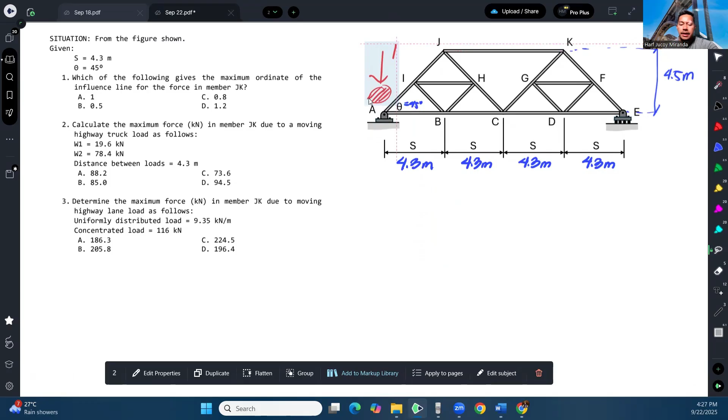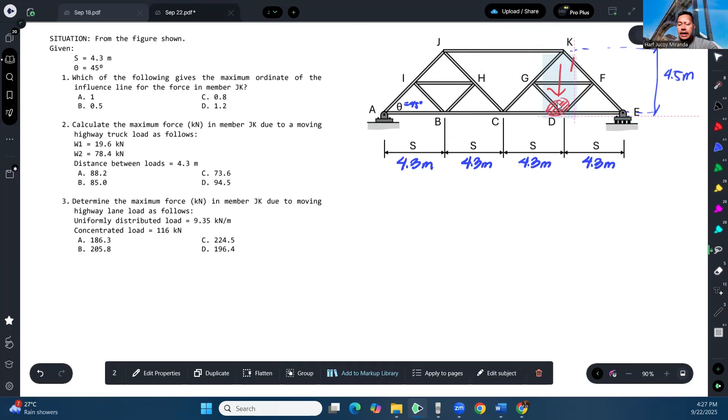So first, we place the load here, then find what the reaction of JK will be when the load is here. Then we move it to B, and find the reaction of JK again, and so on, repeating until we finish going across the truss. This will be the influence line for JK.

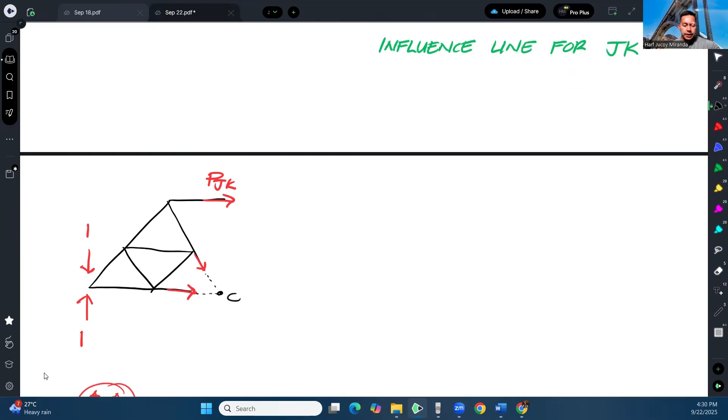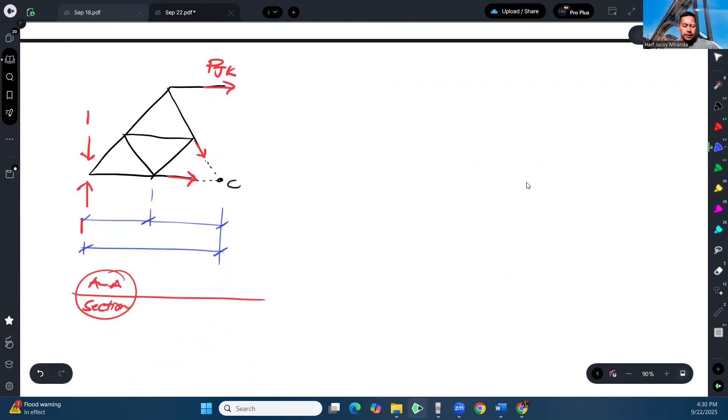So this distance is 4.3, then this is 8.6, and this is also 4.3.

Let's do summation of moment about point C equal to 0, assuming counterclockwise is positive. By the way, I assumed JK and the other members are in tension, which is just an assumption, but that's our standard assumption for trusses.

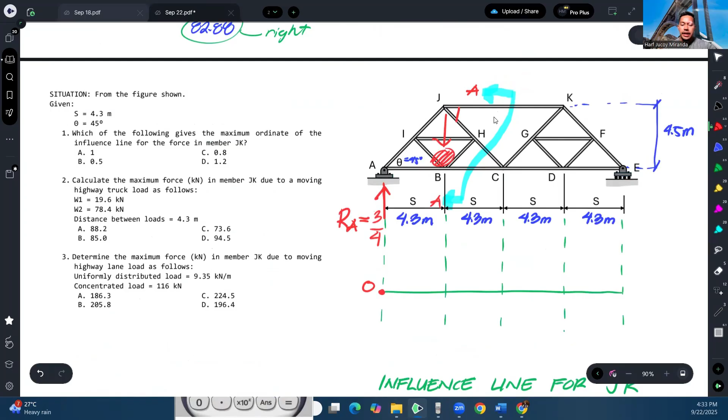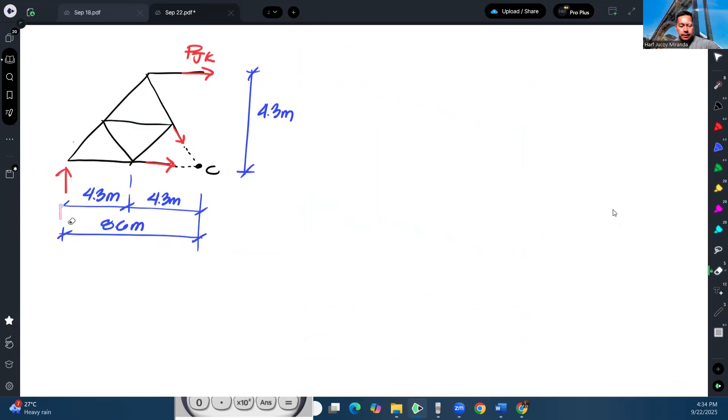So para makuha na naman natin yung reaction sa JK, magme-method of section ka lang ulit. So balik, ito pa rin yun, no? Yan pa rin. Pero ito malilipat, kasi ito hindi na 1, 3/4 na. Nandito na yung 1. Yan. Okay? Ito yung section AA pa rin.

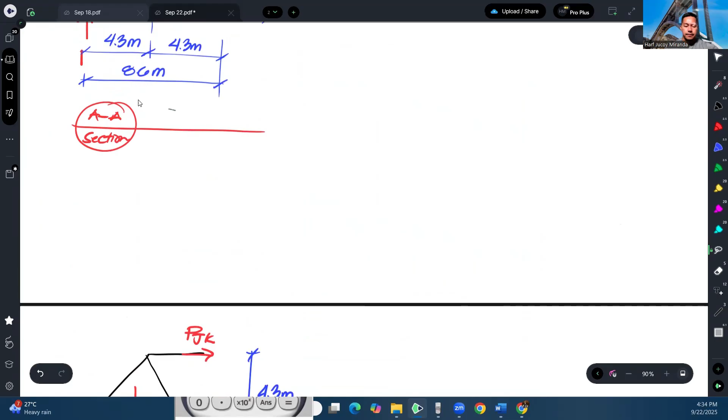Okay, so once again, para makuha natin yung reaction kay JK, mag-moment lang ulit tayo sa C.

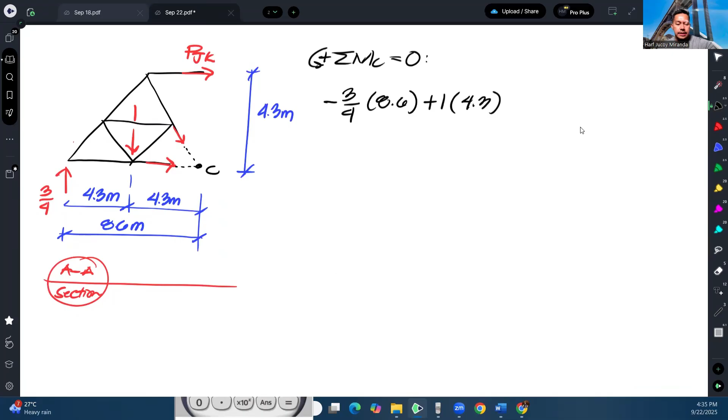So we have, unahin ko na itong 3/4. So 3/4 times 8.6, that is gonna give you clockwise. And then yung 1 kilonewton times 4.3, and that is counterclockwise. And then yung force sa JK, ang moment arm is 4.3 and then clockwise. Ayan, so we can solve for the reaction at JK. So that gives us negative 3/4 times 8.6 plus 4.3 minus x times 4.3. Okay, and that gives us negative 0.5.

So ibig sabihin negative, ibig sabihin pag nandito yung load, si JK, compression, kasi yan yung ordinate niya, negative 0.5. So balik tayo dito, kung nandyan yung load, nandito ngayon yung value nito, 0.5, nasa baba kasi negative. Okay, and then we will just continue this.

This time, ilipat naman natin siya dito sa gitna. Okay? Kapag nilipat mo yan sa gitna, hindi na ako mag-solve ng reaction, symmetrical na, so 1/2 na to. Okay, 1/2 na siya, tapos balik, method of section na naman.

So ito ulit, bali, kopyahin ko lang to, actually kopyahin ko na lahat. Mag-edit-edit na lang tayo. Yan, so bali ito, 1/2. Tapos ito, wala na dito, wala na dyan. Actually nandito na siya, nandyan na yung 1. At dahil nandyan na siya, actually di na siya kasama dun sa free body diagram nito, kasi ito lang yung section natin eh. So wala na, hindi din natin isasama.

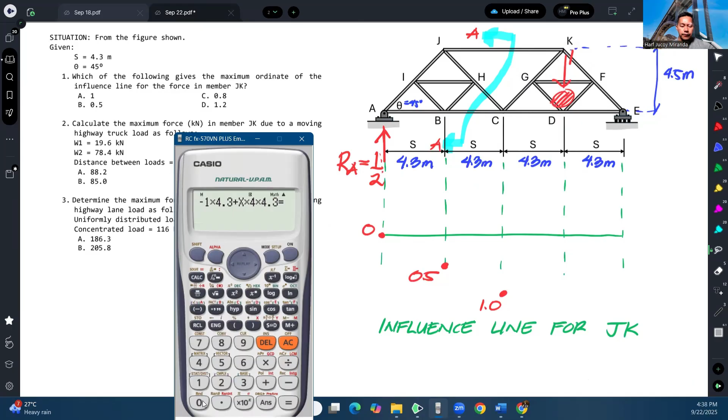Okay, and then next, lipat natin to dito, dito naman siya. Kapag nandyan naman siya, again mag-moment tayo dito sa E, no, para makuha yung reaction sa A. Moment sa E, so 1 times 4.3, okay, clockwise yun, and then plus reaction sa A times 4 na 4.3. So lalabas dyan 1/4. Ayan, so 0.25, so 1/4 yung reaction dito.

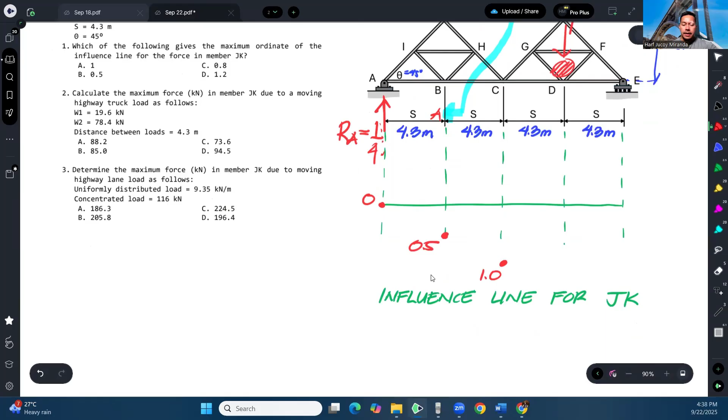Okay, so kapag ganyan, ito ulit, method of section ulit. So I'll just copy this once again. Okay, but this time, 1/4 na lang to. Tapos wala na dito yung 1 kilonewton. Okay, so the equation will look like this, ito 1/4.

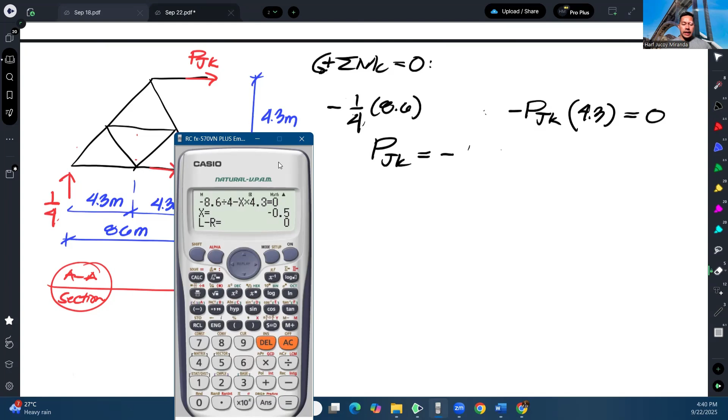Ayan, okay, so kapag ganyan, we will solve for P at JK. So that's negative 8.6 over 4 minus PJK times 4.3, and that gives us negative 0.5. Okay, so our influence line ordinate when the load is at point D is negative 0.5.

So ito, ayan, and lastly, kapag nilipat natin to dito, ito hindi ko nasasolve ah. Pag nilipat mo yan siya dyan, ang magiging reaction mo dito, zero.

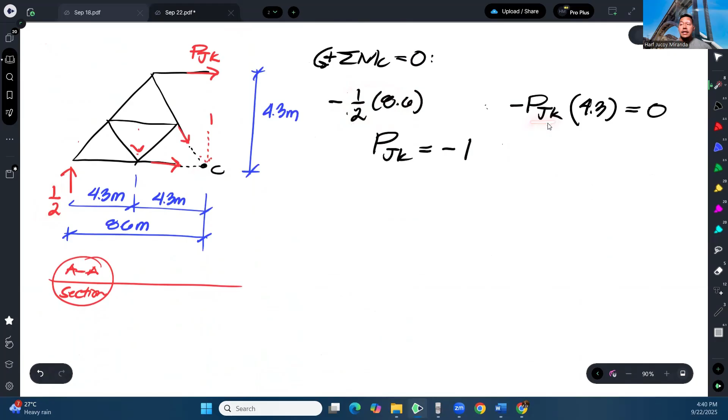Zero na to, kasi nandyan na siya. So ang sasalo dyan, yung reaction na sa E. Kapag nag-zero to, nag-method of section ka, isipin nyo zero to. So pag nag-moment ka dito, zero to. Anong mag-value ng JK? Zero din, kaya ang magiging ordinate natin when the load is here is zero.

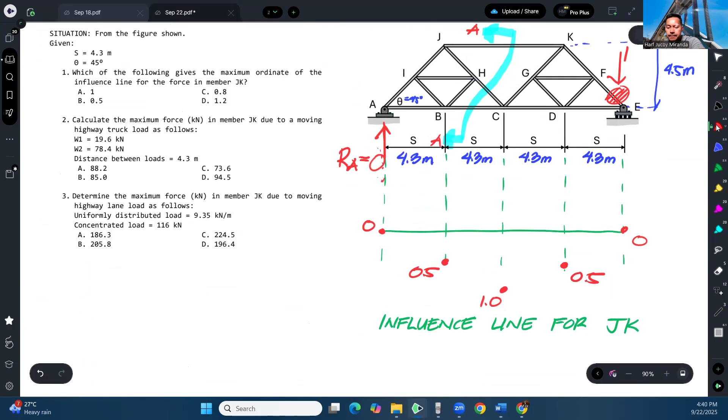So therefore, ito yung influence line diagram natin. That is our influence line diagram for JK. And our answer for number 1, what is the maximum ordinate? That would be 1.

Okay, paano ba ginagamit? Para saan ba yung influence line na yan? Para mas mabilis mong masolve yung magiging reaction dun sa certain member once you load the moving load. And you can also identify saan mo ilalagay yung moving load para ma-maximize yung reaction.

Para makuha natin yung member force, P. Ginagawa natin yung concentrated load, let's say meron tayong concentrated load, F, i-multiply natin sa ordinate. Kapag naman ang binigay sa iyo is uniform load, W, i-multiply mo siya sa area ng influence line, para makuha mo yung reaction. So pagka concentrated load, i-multiply mo lang siya sa ordinate.

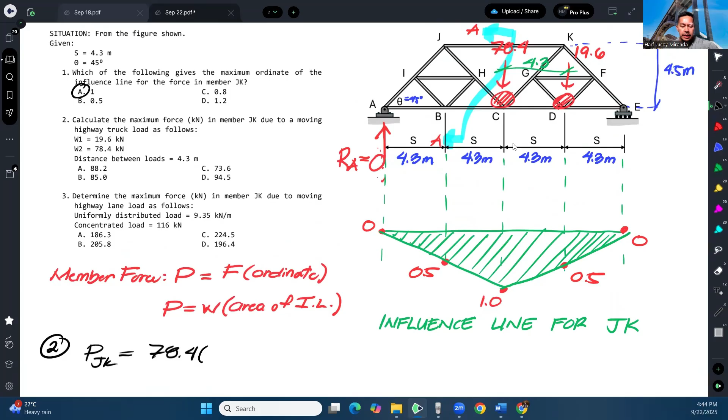So therefore, yung magiging force sa JK ay equal sa 78.4 times 1 plus, saan to tatapat? Dito nagkataon, dahil 4.3 yan, sakto yan, nandito yan. Kung nandito yung larger load, nandito yung smaller load, sakto yan na ang ordinate mo ay 0.5. So that's plus 19.6 times ordinate na 0.5.

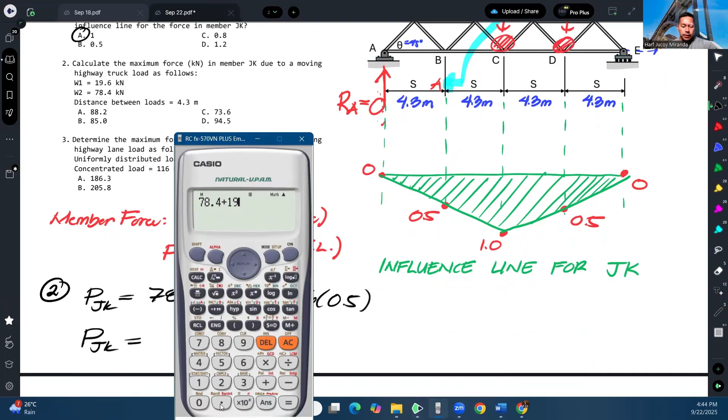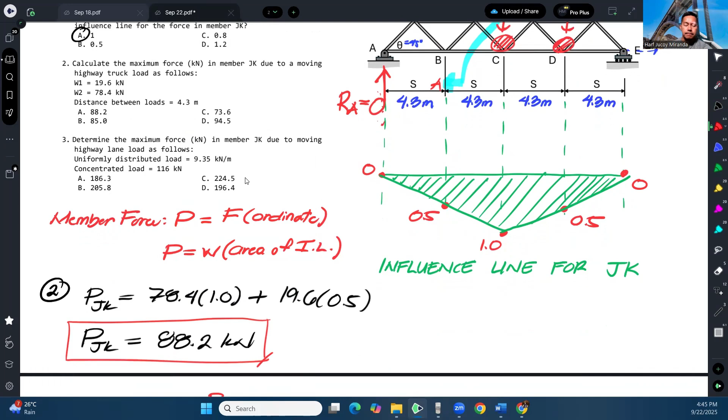So therefore, the force in member JK would be 78.4 plus 19.6 times 0.5. So that is 88.2 kilonewtons. So letter A.

Next, determine the maximum force in member JK due to moving highway lane load as follows. Yung uniformly distributed load na 9.35 kilonewton, tapos concentrated load na 116. Paano kaya natin mapuproduce dyan yung maximum na load sa JK?

So ganito pa rin yung influence line natin. Para ma-maximize natin itong concentrated load, itatapat natin kung saan yung largest ordinate ng influence line. So dito natin ilalagay yung 116. Tapos yung distributed load, i-multiply mo yan sa area ng influence line. Mapapansin nyo, kahit saan mo ilagay yung uniform load na yon, mag-produce naman yun ng negative na area, so that means compression lagi si JK.

Ibig sabihin, i-load na natin ito sa lahat, doon natin siya lalagay sa lahat, para mangyari, multiply mo lang yung uniform load dun sa area nito. So anyway, magiging for number 3, let me just copy natin yung ano.

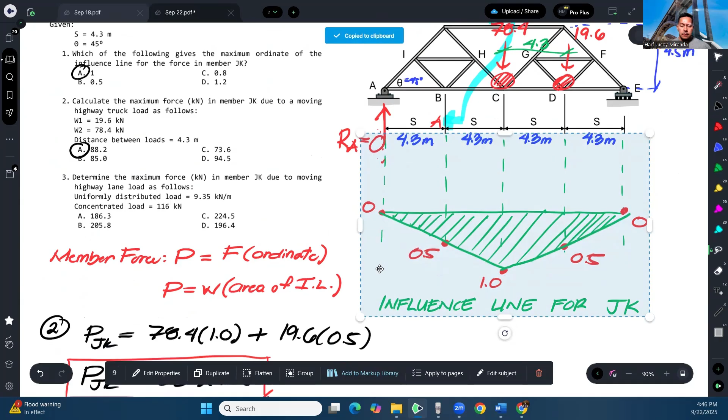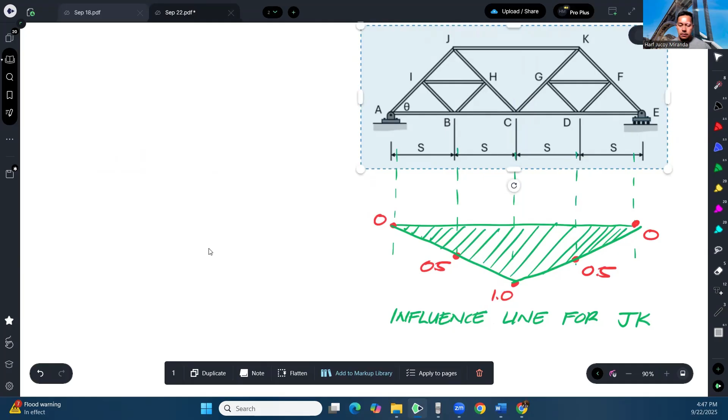Okay, bali ang ibig ko sabihin ay yung 116 dito natin lalagay. Hindi, unahin ko muna yung uniform load. Yung uniform load, lalagay natin sa lahat, para yung lahat ng sakop ng area, ma-utilize natin. At ang magnitude nga pala ng uniform load is 9.35 kilonewton per meter. Tapos yung concentrated load, dito din natin lalagay sa gitna, 116 kilonewton.

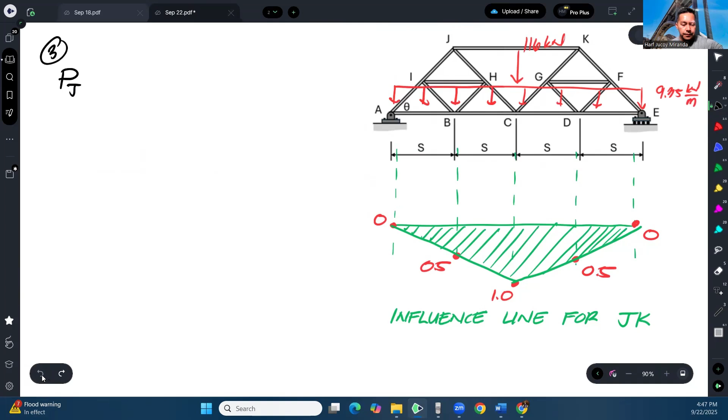Okay, so therefore, yung magiging force sa JK in this situation, maximum, ay 116 multiply mo ng 1 plus yung uniform load na 9.35 multiply natin ng area. So ano bang area niyan? Bali, 1/2, ang base natin itong buong to, that's 4.3 times 4, di ba? 4.3 times 4 times yung height na 1. Bali, 1/2 base, ito yon times height, yung 1.

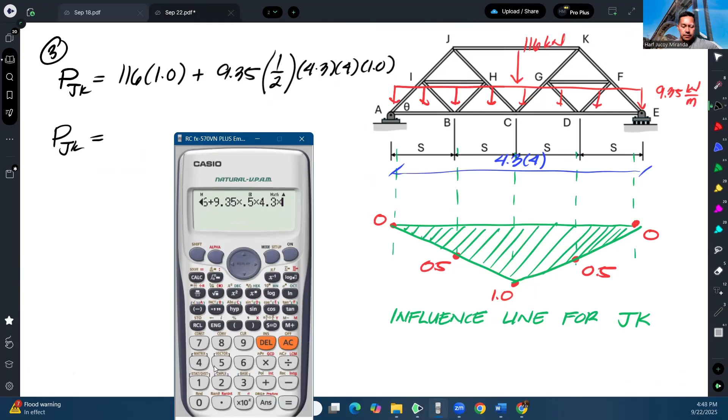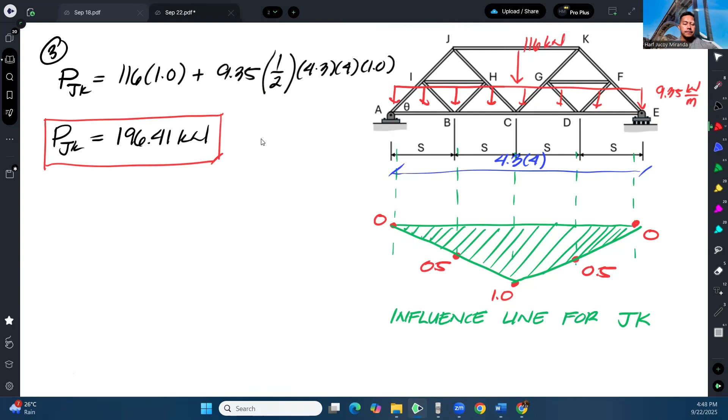Okay, so that will give us the maximum load for JK in this particular scenario. And that is 196.41 kilonewtons. So our answer for number 3 is letter D.